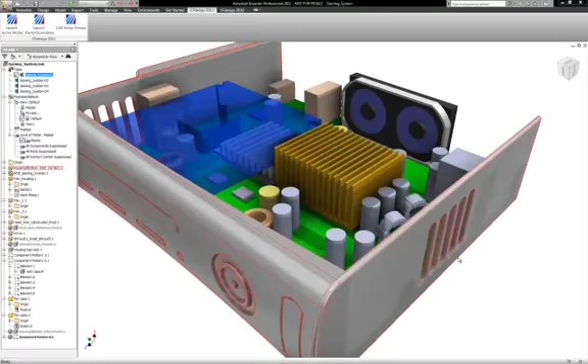Where this all starts is inside of your CAD. What we do is leverage the existing configurations that you're already creating. In this case, I'm inside of Inventor, creating an iAssembly with 4 different configurations, moving the vent, changing the heat sink, adding a shroud, those sorts of things. Now I want to bring in all 4 of those different designs at the exact same time and set them up, and that's what CFdesign's Design Study Builder allows us to do.

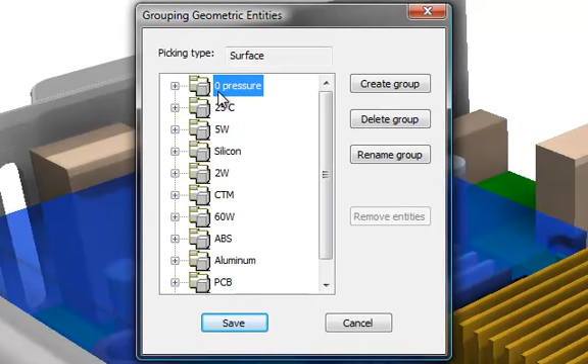What we can also do is add intelligence into our CAD models. I want to add information like 0 pressure for my inlets and outlets, maybe 25°C for an inlet temperature, and I can even identify material properties and heat generation right inside my CAD package. Once I've set up this information, it's stored inside my CAD file, ready to be retrieved whenever I do my simulations. So let's start the design study.

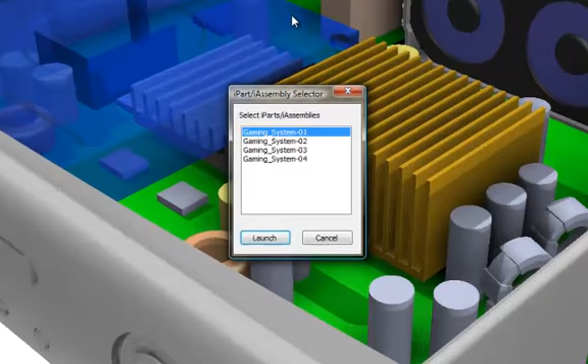I'm going to grab all 4 of these gaming system design configurations, and the first thing you'll see is our Design Study Builder. This allows us to grab a template that has all of these different conditions already applied. We've run electronics configurations and simulations before, so I'm just going to leverage that template and use that information again.

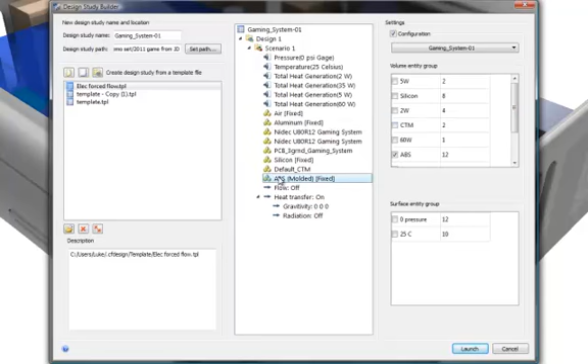All I do is associate what configuration I want to this first design. I associate my boundary conditions and my material properties. The benefit here is I can quickly and effectively set up these simulations over and over again, regardless of the type of electronic system it is.

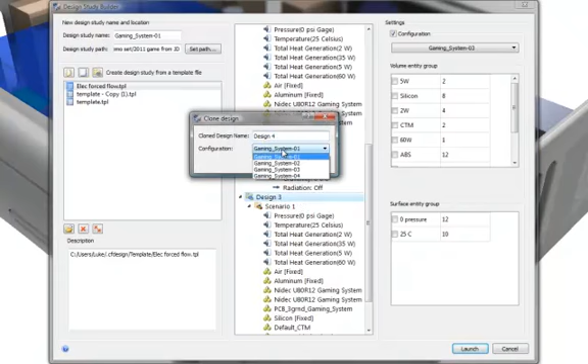All I do now is clone the design, choose which configuration I want to associate it to now, and all of that information from the first setup is copied to the second. I'll do that for my third design and finally for my fourth. Now that I have all 4 of my electronics enclosures created here inside of my Design Study Builder, I'm just going to go inside of CFdesign and look at the setup now.

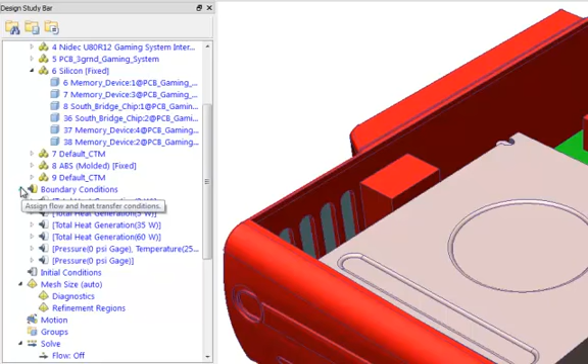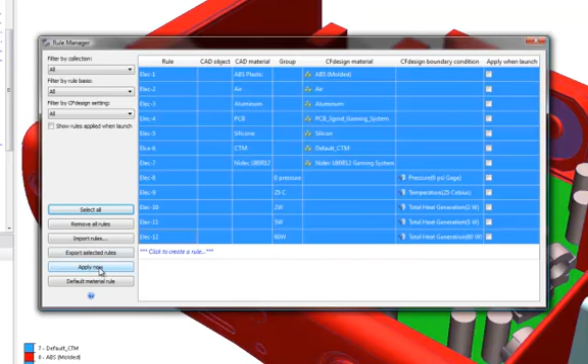Once inside of CFdesign, you'll see on the left-hand side that my simulation is completely set up for me. My material properties are assigned, my boundary conditions are assigned. All of this was because I leveraged that template that had all of this information in it, and I have rules that automatically apply additional information for me. What I have here is a list of 12 rules that apply to any electronics enclosure I work on. I simply grab them and apply them now, or I can have them automatically apply like I did in this case.

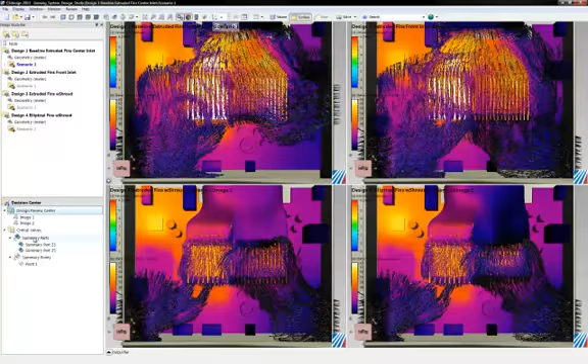So let's take a look at some results inside of CFdesign. CFdesign has given us side-by-side comparisons of 4 different designs here. Not only can I gather this qualitative feedback, but I can also get quantitative feedback.

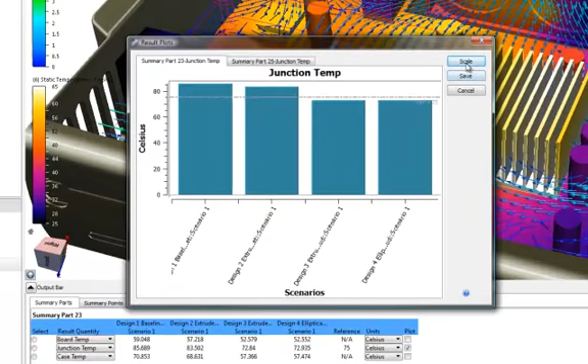Let's say I want to know the temperature of my GPU and CPU to see if it meets my specs. I simply plot out what those are based off of the reference. I can see that the junction temperature of my GPU in my first 2 designs exceeds my spec, and in my CPU, my first, second, and fourth are exceeding.

All of this design insight was made possible by CFdesign's Design Study Automation tools, allowing us to set up simulations faster than ever before.